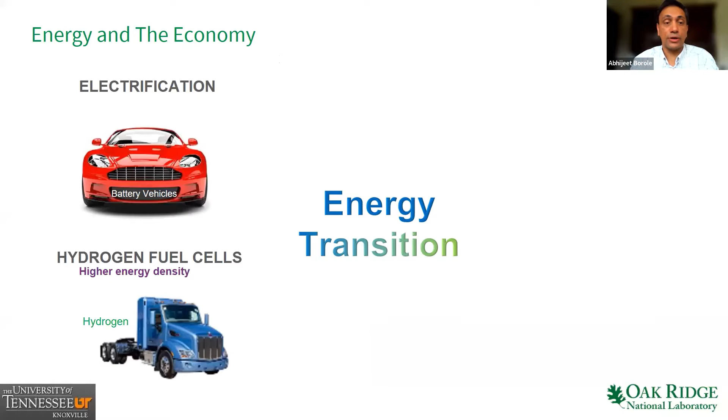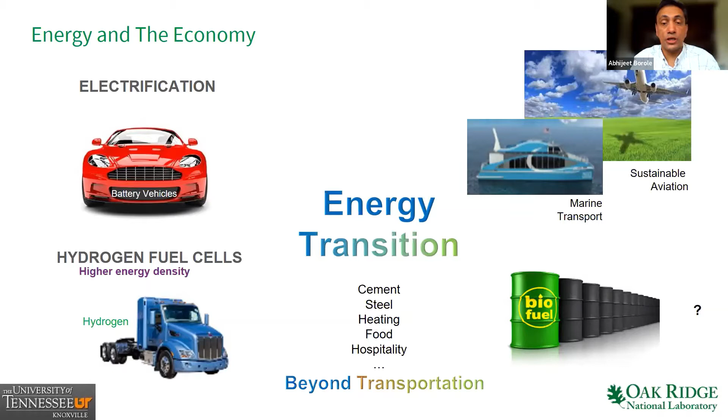As we all know, there's a significant energy transition going on today, and there is a big move towards electrification. However, there is also a lot of push for hydrogen, and the hydrogen economy is really growing up. There is a need for also changing the fuels that we use for aviation and marine transport, so whether the answer is biofuel is a question. In addition to transportation fuels, there is also a need for moving from petroleum-based energy to other clean energy for cement, steel, and other kinds of industries.

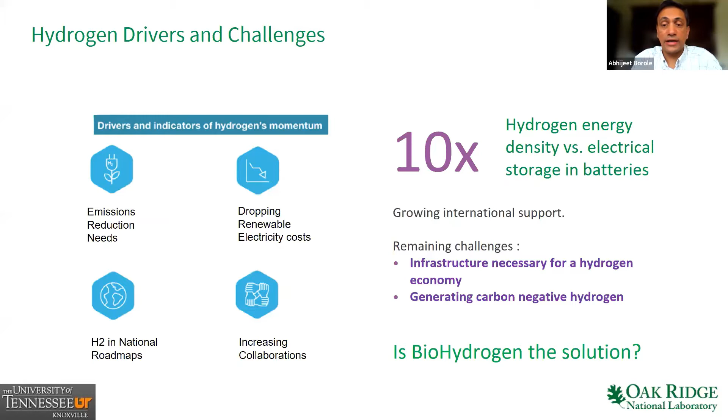So hydrogen has significant drivers and challenges that are coming up, and over the last 3 years there has been a ramp up by different countries and different corporates moving along to really contribute to hydrogen production. Today's challenges remain developing the infrastructure for producing hydrogen, and also developing carbon negative or green hydrogen solutions. So again, biohydrogen is a good candidate, and we'll discuss that today.

In terms of biohydrogen production pathways, there is the fermentation pathway, which is basically anaerobic conversion of sugars and other molecules into hydrogen. The second pathway is biophotolysis, which uses light and microalgae or other photosynthetic bacteria to produce hydrogen. And the third one is microbial electrolysis cells, which is an integrated biological and electrochemical catalysis pathway to convert organic molecules into hydrogen with application of a small voltage.

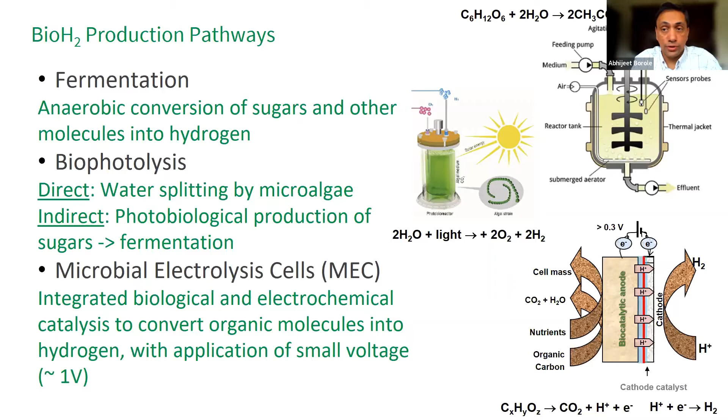This slide gives you a starting overview of the potential for producing hydrogen from these particular technologies. Starting with fermentation, in comparison to the hypothetical hydrogen production from a molecule of glucose, which is 12 moles, in fermentation you can only produce 4 moles of hydrogen per mole of glucose. Practically, you have about half of that observed in the lab as well as at full scale. The second one is a modification of that, where we combine photofermentation with dark fermentation, and that way you can actually increase the yield of hydrogen to 12 theoretically.

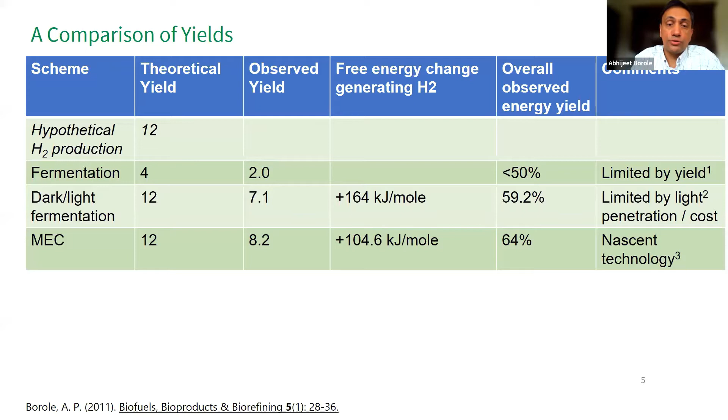Practically, there have been numbers like around 7 moles of hydrogen per mole of glucose that have been reported. The third one, microbial electrolysis, is also capable of producing 12 moles of hydrogen, and the yields observed have been slightly higher in this particular technology, which is very new.

In comparison to the non-biological routes for converting sugars into hydrogen, there's autothermal reforming, which can produce 10 moles theoretically and practically about 9.5. Also the biomethane pathway through SMR, which is 8 theoretical moles and 6 observed moles.

So in order to move the fermentation process, developing commercial technologies based on fermentation, there are a few limitations. Besides the 4 moles of hydrogen per mole of glucose, there are also significant amounts of volatile fatty acids produced in the process, which result in high effluent BOD that cannot be disposed of very easily. Also, there may be pretreatment requirements for removing inhibitors, and there's a need for separation of hydrogen from carbon dioxide, which is produced in the process.

There is definitely a lot of scope for improvement in fermentation processes, particularly in combination with photofermentation, as I indicated earlier. Developing these photobioreactors for combined dark-light fermentation or separate fermentation is one of the pathways for improving these technologies. There's significant work also going on in genetic engineering of microbes to improve the hydrogen yield through metabolic engineering.

If you look at biophotolysis, which is a way to use light in combination with the biological process, always the problem with the photoreactors is the penetration of light to really provide the energy required for conversion and production of hydrogen.

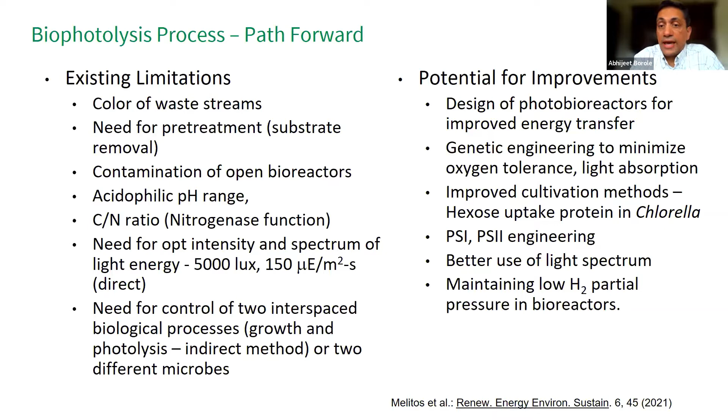I would like to move into the microbial electrolysis technology, which is where I have done most of my work and focus. One of the things with this technology, as I indicated earlier, is that you can produce 12 moles of hydrogen per mole of glucose through this technology, and there's potential to really use electricity which is available in abundance, and sometimes we have to not use it because batteries are not available and so on.

So microbial electrolysis is a way to really combine biology and electrochemistry to make hydrogen. Similar to the other processes, this also has a number of limitations which can be addressed by improving the process design, system design, as well as biological parameters.

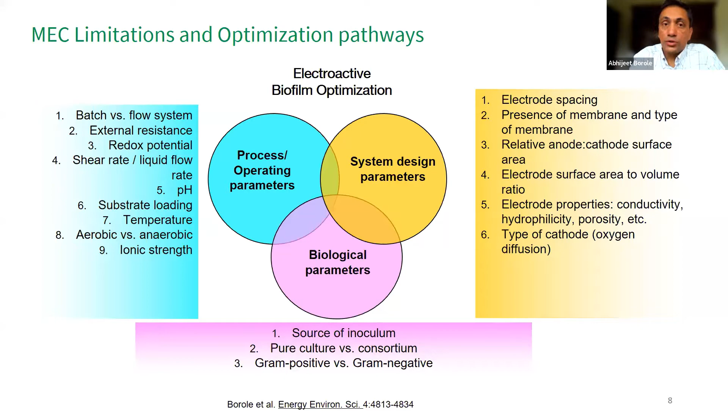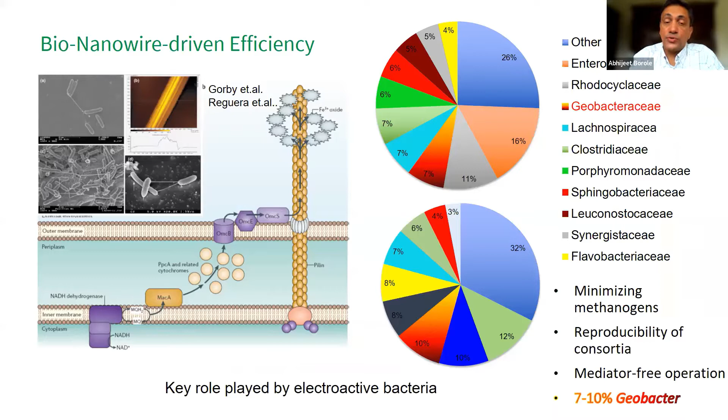The key to this process is the biofilm, which is actually capable of converting sugars and other molecules into electrons, which are then converted into hydrogen through electrolysis, kind of a partial electrolysis process. The key to this is the electroactive bacteria, which do electron transfer directly from the microbe to the electrodes. This allows the process to really have a high efficiency.

I show here a couple of pie charts, which are basically different microbial consortia developed for treating waste and biomass related streams into hydrogen. The typical microbe utilized in these systems is Geobacter sulfurreducens and other Geobacter species. In typical consortia for production of hydrogen in these systems, it can be as low as 7 to 10%, but also as high as 90%.

Now I'd like to look at the interface between biorefineries and hydrogen. There are three main pathways which are looked at in biorefining for producing biofuel and other building blocks that we need for the future. The biochemical pathway uses fermentation of biomass to make alcohols and other products - this is one pathway we will look at. The other one is thermochemical, which uses pyrolysis or gasification of biomass to make products.

And then the third one is algal feedstocks, which are typically processed via hydrothermal liquefaction to produce a bio-oil, which can then be converted into biofuels.

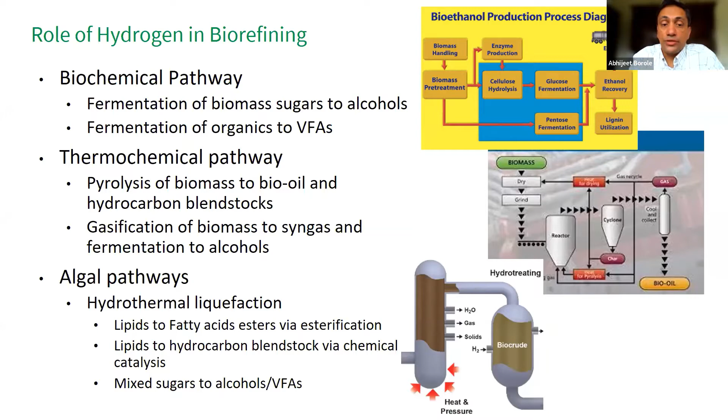So in these collaborations, we work with these national labs to use the waste streams they provided to make hydrogen, and also look at different kinds of pretreatments, including pyrolysis, hydrolysis, and so on.

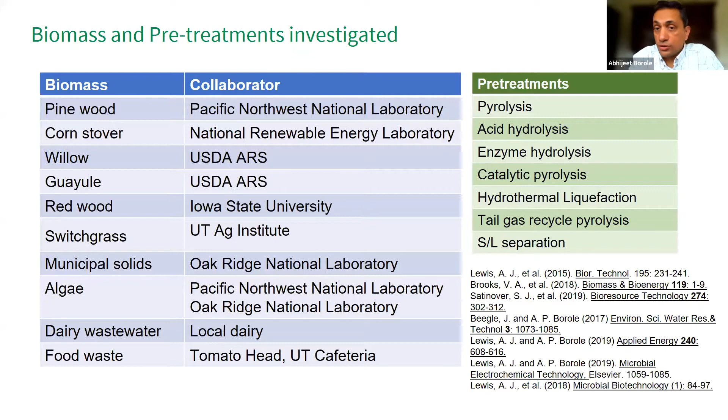So I would like to give you an overview of the potential performance metrics that we can obtain for these kinds of systems, and then go into the details of how this can be implemented in the biorefinery.

So to start with, I would like to talk about the performance criteria for microbial electrolysis. Of course, hydrogen productivity is a main target for achieving commercial feasibility. And then there are a lot of other efficiencies related to conversion of waste into electrons and then into hydrogen, corresponding to anode efficiency, cathode efficiency, COD removal efficiency, as well as electrical efficiency.

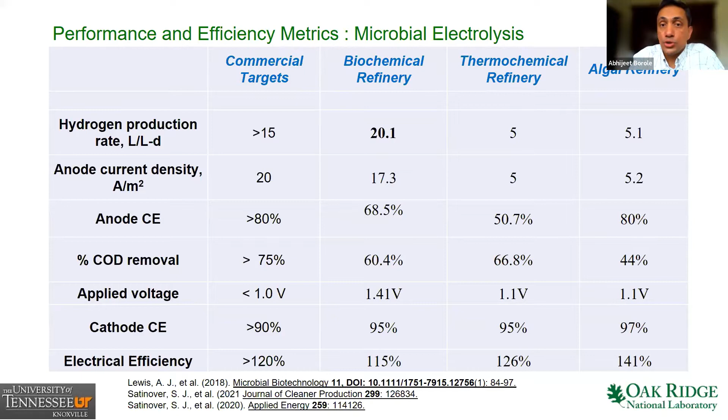Interestingly, in the last few years, the target for hydrogen production, a rate over 15 liters of hydrogen per liter of reactor per day, has been achieved using some of these streams. The efficiencies of producing hydrogen from waste materials and biomass have been demonstrated, which encourages developing this technology at commercial scale.

So some details about the biochemical conversion pathway and how microbial electrolysis can be coupled to the typical biochemical refining process. This work was conducted in collaboration with the National Renewable Energy Lab using corn stover as a feedstock.

The hydrolysis process breaks it down into a liquid stream, which is fed to a fermentation reactor. And the effluent that comes out of fermentation, which is basically unconverted molecules, was then used to make hydrogen. This essentially allows you to improve the overall energy efficiency of the process, as well as produce hydrogen for other uses.

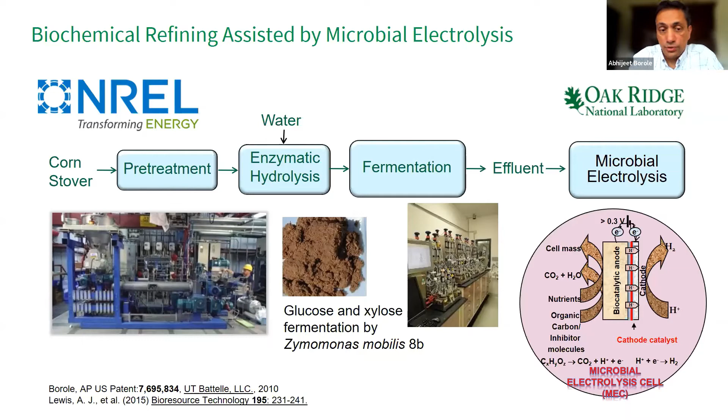The second one I'm going to talk about is pyrolysis microbial electrolysis, which is a way to convert biomass into biofuels and hydrogen through this pathway, which integrates pyrolysis and microbial electrolysis.

In this example, switchgrass was pyrolyzed, producing a bio-oil, and then the bio-oil was separated into an aqueous phase and an organic phase, because as many of you may know, there's a significant high oxygen content in bio-oil, as well as high water content.

So in order to make biofuels from oils that are derived through biomass pyrolysis, you have to do a lot of oxygen removal, or deoxygenation, which requires hydrogen.

So the concept here was to provide that hydrogen through the aqueous waste produced from pyrolysis, via microbial electrolysis, and then generate hydrogen. This results in two potential products: hydrogen as well as bio-oil, which can then be converted into liquid fuels through deoxygenation via the renewable hydrogen that is produced.

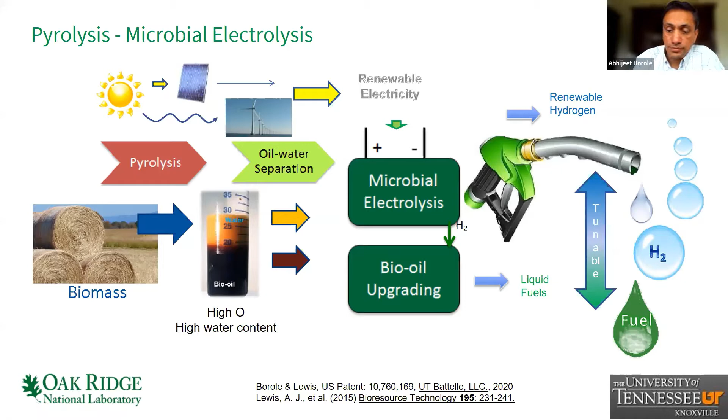The other refineries that have been looked at use algae as a feedstock. In this example, the algae were broken down through hydrothermal liquefaction, producing a bio-oil, and then the aqueous part of that bio-oil was used to produce hydrogen.

In this process, because of the high nitrogen content of algae, you're actually able to also potentially produce a side stream of ammonia, which can go into fertilizer production and so on.

So in this particular process, we had also looked at nutrient recycle to allow minerals and so on to be recycled into the algae pond. This really results in a circular algal biorefinery kind of concept.

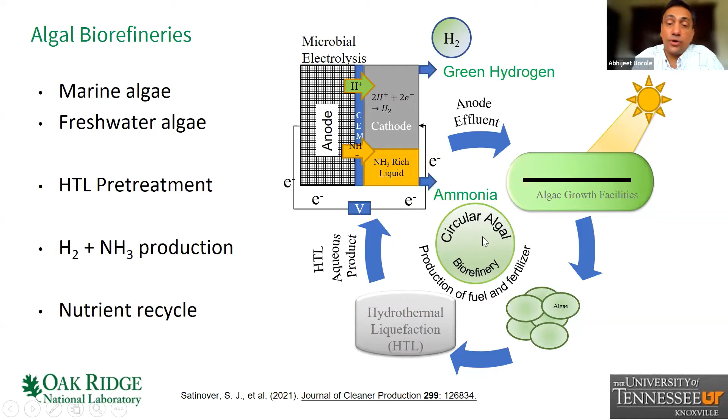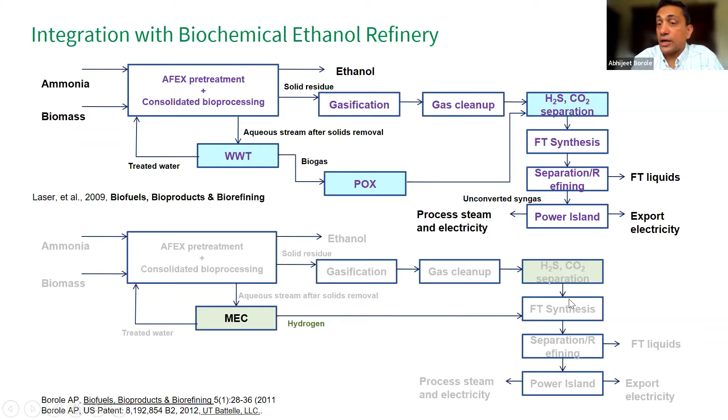When you want to apply these different concepts at the biorefinery scale, here is one example, because you want to integrate the processes with mature technologies. This gives one example of how that can be done in a biochemical refinery, where you could use AFEX treatment, using ammonia, or consolidated bioprocessing, which produces ethanol, but then the solids can be gasified to produce syngas, which can be cleaned up to use as Fischer-Tropsch synthesis feedstock. But you do require hydrogen for that. In this particular mature pathway, you could do that through wastewater treatment, producing methane and partial oxidation of the biogas. However, if you are able to use microbial electrolysis, as we showed, you can potentially directly produce that hydrogen and supply it to the Fischer-Tropsch synthesis to increase the hydrogen content of the feed.

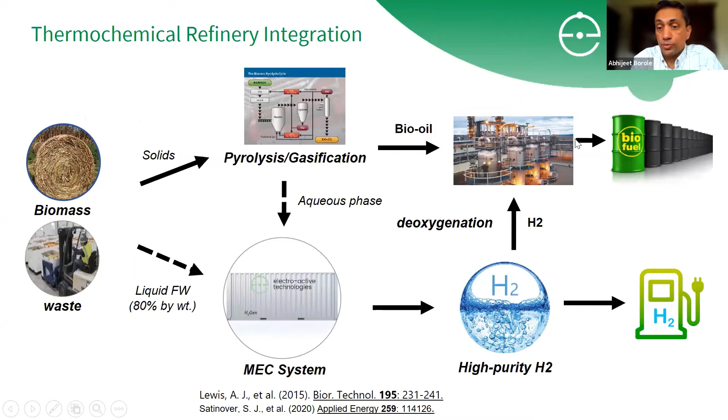Going to the pyrolysis kind of process, you could use the hydrogen produced through microbial electrolysis to deoxygenate the bio-oil and produce biofuels. Similarly for algal fuels, you could take the algae, make the bio-oil, and then use the hydrogen to produce a clean biofuel, while also potentially having hydrogen available for individual sales.

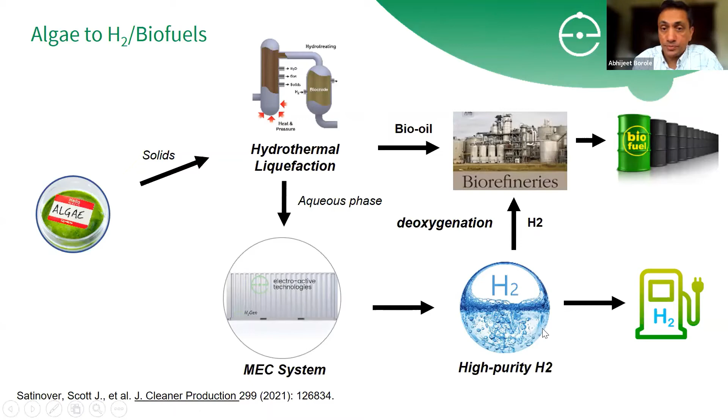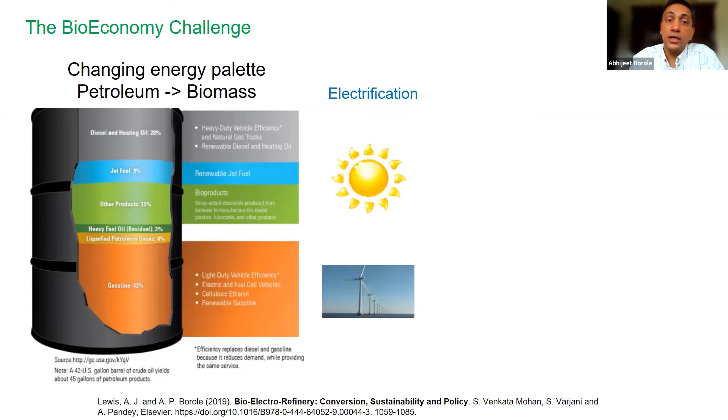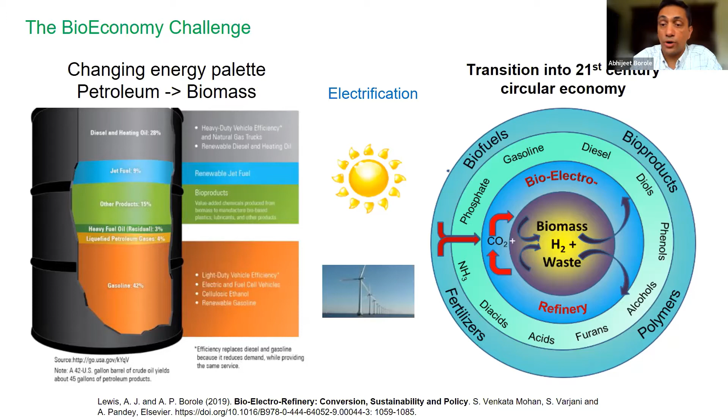When you want to integrate all of these processes into a biorefinery, there's a significant need to move from fossil fuel based economies to biomass and bioeconomy. So you have a whole palette of products that we generate today from petroleum. In order to convert those into the materials and feedstocks we need for our 21st century, you want to combine the current economy, which is moving towards electrification, with biomass. The pathway to that could be through a bioelectrorefinery, where you could produce hydrogen and also a number of other products required for economies today, including fuels, food, and chemical feedstocks, which would go into producing bioproducts, polymers, fertilizers, and so on.

When we look at the pathway to commercialization, I talked about biomass and algae. One of the things we have been looking at, as I indicated, I'm also part of a startup. We found out early on that there is another feedstock which might actually be very feasible to use for producing hydrogen, and that was food waste. Similar to biomass, which is available at around 1.3 billion tons in the US, food waste availability is around 1.3 billion tons around the world. That's a significant waste of resources, so that's one of the feedstocks we have been looking at in order to make hydrogen.

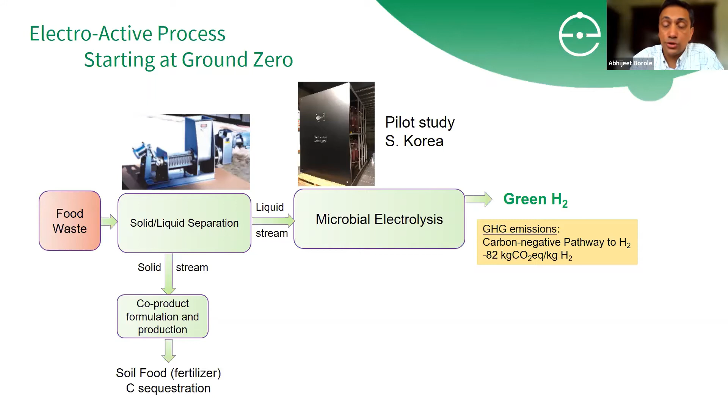We have a pilot study going on in South Korea based on microbial electrolysis using food waste as a feedstock to produce green hydrogen. In the simplest way, you could produce a second byproduct from this, taking the unconverted material from the food waste and returning it back to agriculture as a fertilizer. You could return NPK as well as carbon back to the soil to really create a circular process. So one of the things we are looking at is developing these circular and inclusive processes, converting food waste into a fuel like green hydrogen, plus fertilizer and a water stream, which can contribute not only to CO2 emissions reduction, but also to other ESG parameters critical for many corporates today as we move towards a clean and circular economy.

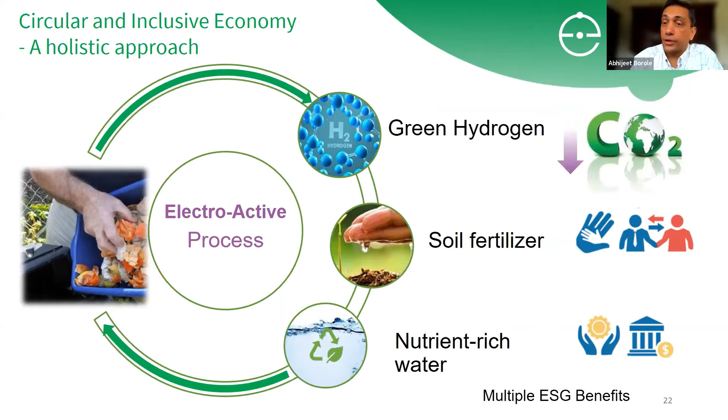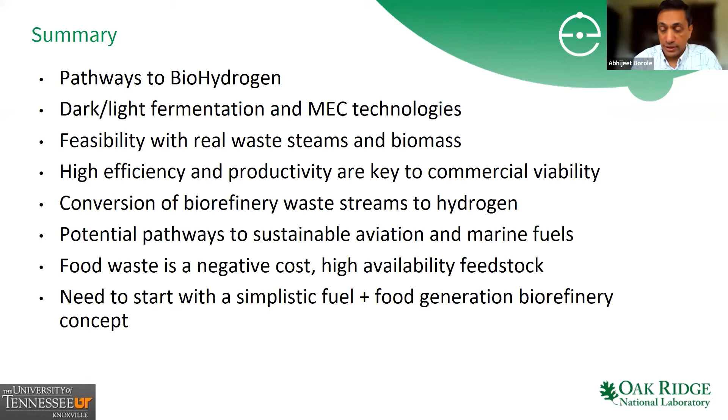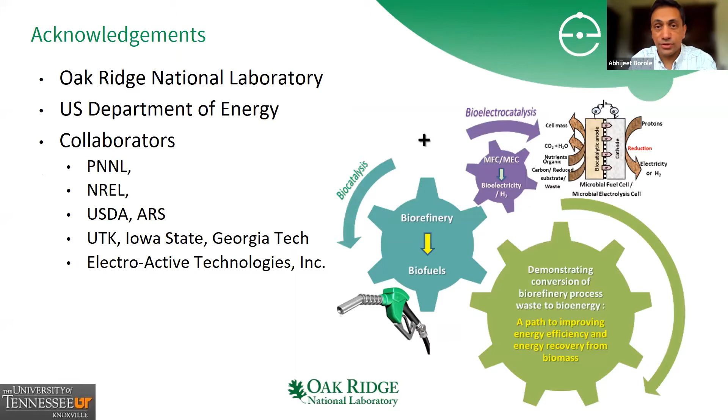So with that, I would like to wrap up and summarize our discussion. We talked about the pathways to biohydrogen and how dark and light fermentation and MEC technologies can lead the way, the feasibility of using real waste streams and biomass, and the key parameters of efficiency and productivity of hydrogen that make this possible. We discussed how we can integrate MEC technology into a biorefinery to make hydrogen for producing clean biofuels, targeting sustainable aviation fuels and marine fuels, and the ability to take food waste as a negative cost feedstock to make hydrogen, entering a circular economy using food waste to produce fuel and food additionally in a circular process. With that, I'd like to acknowledge the work done at Oak Ridge National Lab, the US DOE for funding, and collaborators at the different national labs. I'll stop and transfer the screen back to you.

Thank you so much, Abhijeet. It has been extremely interesting and informative. You've guided us through all the various processes. It was interesting to notice the variety of biomass you mentioned that could be used, and it was extremely interesting to see the circularity approach you stressed more than once — the importance of looking not only at energy production, but also at bioproducts, which is the win-win of these kinds of technologies, looking also at soil fertility rather than just nutrient-rich water. Thank you so much for this extremely interesting overview. I already see a number of questions being raised in the Q&A and the chat, but we'll leave those for the discussion session.

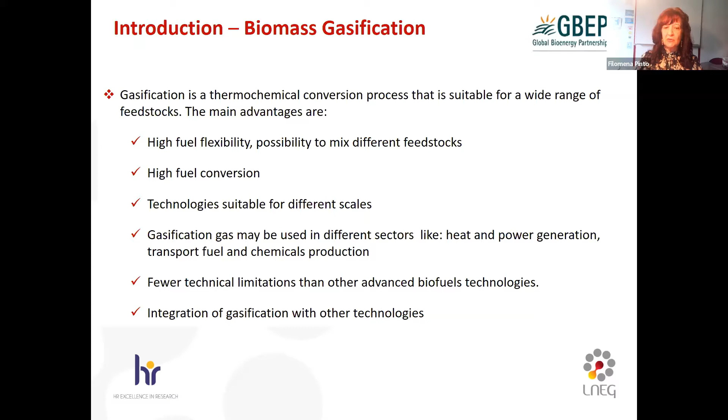To start, I'd like to focus on the fact that it is possible to gasify a lot of feedstocks from biomass, like sewage sludge, forestry biomass, other industrial wastes, energy crops, and so on. But it is also possible to gasify other types of wastes, like plastic mixtures, used tires, RDF, and so on. It is also possible to prepare different mixtures of all these feedstocks.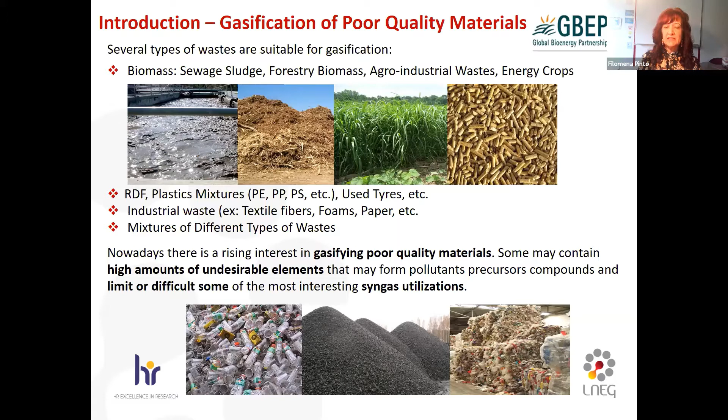Nowadays there is a rising interest in gasifying poor quality materials, but this brings some challenges, because if these materials contain undesirable elements, unwanted compounds will be formed and released into the syngas, which makes the cleaning and conditioning processes of syngas more complex.

Syngas may have different applications. The more developed ones are heat and power generation by using syngas in gas turbines, engines, fuel cells, or boilers. But as mentioned before, it is also possible to produce fuels by chemical synthesis. Some of the most important are presented here.

Syngas may also be used to obtain hydrogen. And as mentioned in the previous presentation, it is also possible to use syngas in anaerobic fermentation to produce bio-based chemicals.

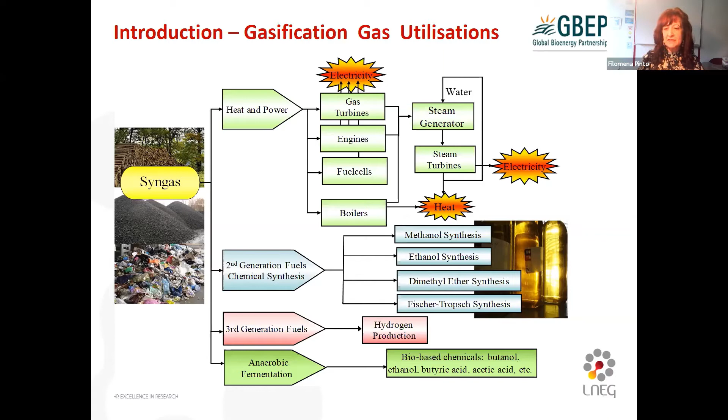Nowadays there is much information about gasification and much knowledge. The gasification main research areas focus on syngas utilization to produce biofuels and biochemicals, to produce synthetic natural gas, to achieve capture, storage, and utilization of CO2 from the gasification process. Another area is to study the possibility of soil impregnation with biochar produced by gasification, and of course, the theme of today's presentation, the production of biohydrogen.

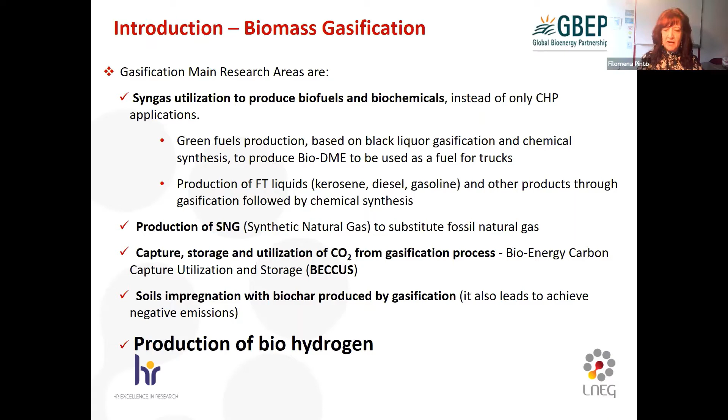So there is a long way from the gasification process to the production of biohydrogen. After production of syngas, cleaning and conditioning processes are very important, because gasification gas composition depends not only on the gasification technology and conditions, but also on the feedstock used for gasification. When the composition of the initial syngas is quite different from the composition required for syngas utilization, cleaning and conditioning may become very complex, which increases the capex and opex.

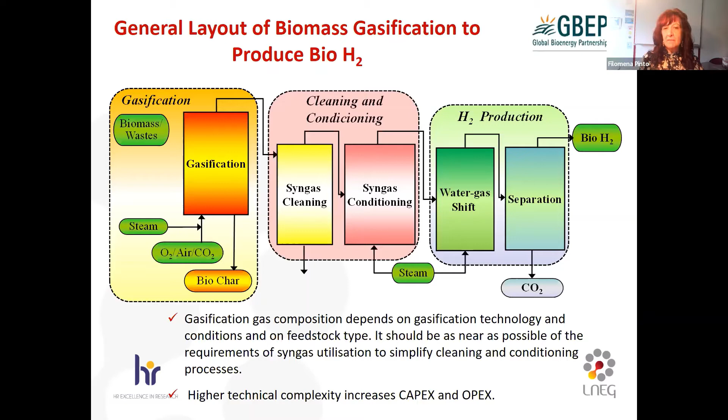Moving to biomass gasification technologies, there are different possibilities: fixed bed, fluidized bed, and entrained flow gasifier. They require different gasification conditions, namely temperature. Entrained flow gasifier requires the highest temperatures and lowest particle sizes. The choice of technology depends on the feedstock we want to gasify and the application we want to give to the gas produced.

If we want to obtain hydrogen, it's important that the syngas is free of nitrogen. We have two options: autothermal gasification, where the heat needed is produced inside the gasifier by partial oxidation of the feedstock - if producing hydrogen, air can be used but oxygen is the best option - or allothermal gasification, where heat needs to be supplied externally.

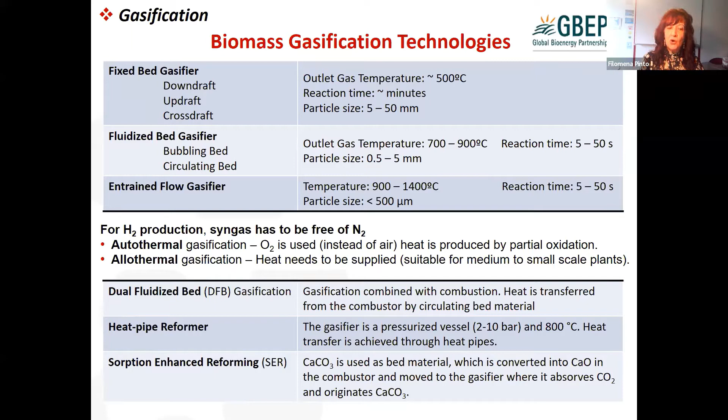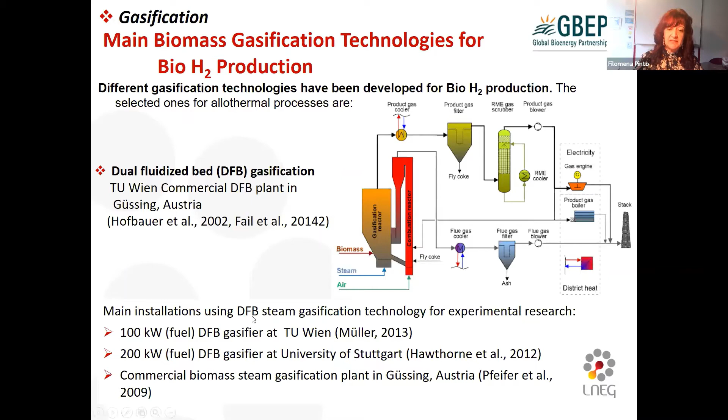Now I'd like to move to some more recent gasification technologies, starting with dual fluidized bed gasification. Here we have two sections: the gasification one and the combustion one. The feedstock is burnt in presence of air to produce heat, which increases the temperature of the bed material that moves to the gasifier and supplies the needed heat. Char and bed material are again transported to the combustion reactor to restart the process. There are some main installations that have tested this technology with success.

The MILENA gasification technology is similar to the previous one, but here the gasifier section is a riser where biomass and steam are introduced together with the hot bed material. At the top of this riser, there is separation of the gas, and the solids go back to the combustion zone to be heated.

In the heat pipe reformer, the concept is different because we don't have a bed material. Instead, the heat is supplied by a heat pipe. We have heat pipes filled with a carrier that evaporates in the combustion zone, and in the gasification zone condensates and releases the heat that is needed.

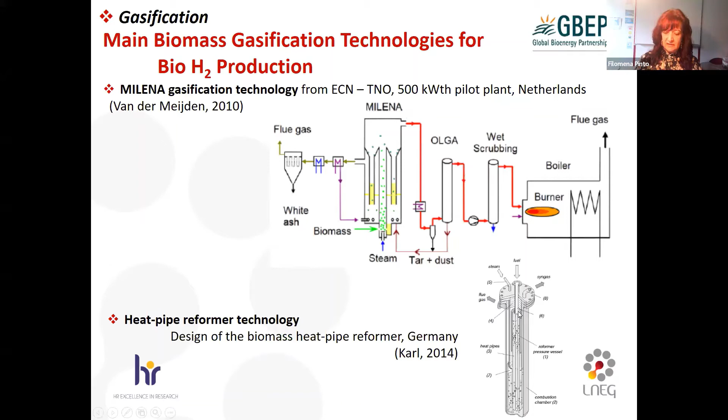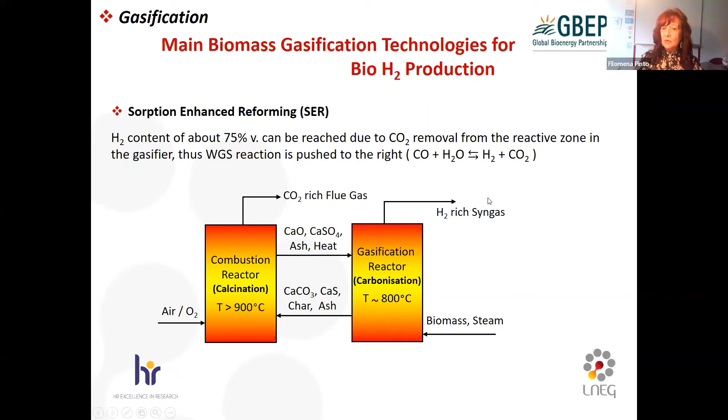Another concept is the sorption enhanced reforming, where two reactors are used - a combustion reactor and a gasification reactor - with a circulating loop. In the combustion reactor, limestone is used, and calcium carbonate releases CO2 and forms calcium oxide, which goes to the gasification reactor and reacts with the CO2 released by the gasification reactions, forming calcium carbonate again that goes back to the combustion zone. Through this process, it is possible to obtain a syngas rich in hydrogen and poor in CO2.

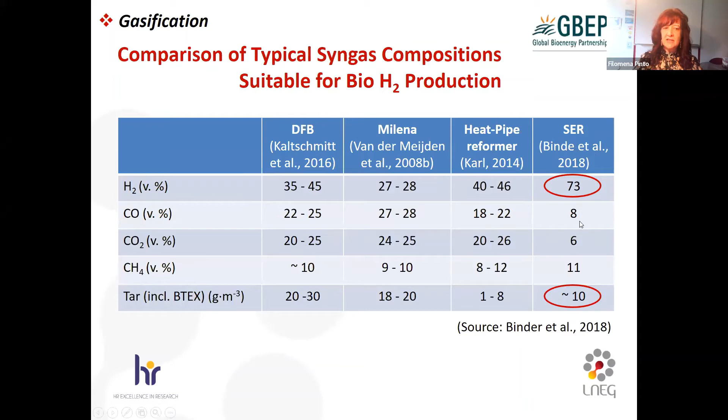If we compare syngas compositions obtained by these technologies, we find that the SER process produces the highest hydrogen and the lowest CO and CO2, and the tar content is also low.

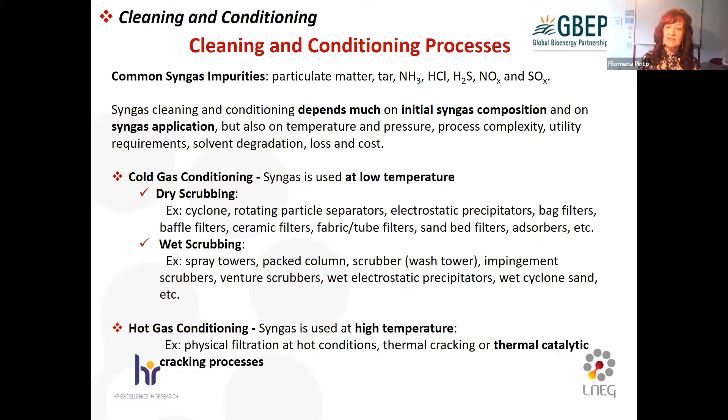Next, we have to concentrate on the cleaning and conditioning processes to remove or at least decrease the contents of the main impurities: particulate matter, tar, ammonia, hydrogen chloride, and hydrogen sulfide. The cleaning and conditioning processes depend very much on the initial syngas composition and also on the syngas application. There are two main options: cold gas conditioning, using low temperatures, where we may choose dry scrubbing or wet scrubbing; or hot gas conditioning, where the gas is treated at high temperature by thermal or catalytic cracking processes, among others. This process is a good option if the syngas needs to be used in a process requiring high temperature.

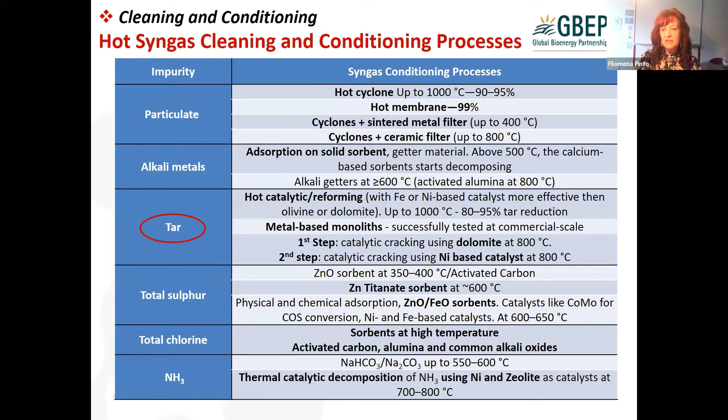Here is a list of some syngas conditioning processes to remove different impurities. I would like to call your attention to tar, because tar is a big problem in gasification processes. For tar abatement, different types of catalysts have been developed and tested, some with good results.

Now I would like to speak a little about the water-gas shift reaction, because it allows an increase in hydrogen content in the syngas through the reaction of CO with steam. Different processes and catalysts may be used, some resistant to sulfur poisoning, some not. In this last case, it is necessary to concentrate on the cleaning processes to decrease sulfur content.

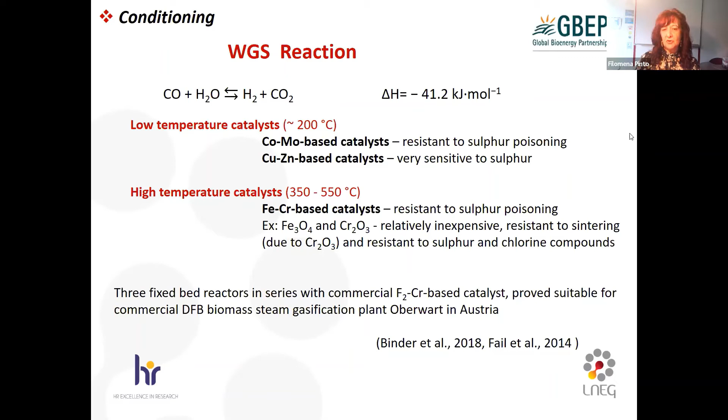As an example, I could mention the tests done at the Oberwart plant in Austria, which successfully tested 3 fixed bed reactors in series using commercial catalysts.

There are many cleaning and conditioning processes, and I don't have time to mention all of them. So I would like to refer to important ones for the biohydrogen route: tar removal by rapeseed oil methyl ester scrubber, where by decreasing the syngas temperature, steam is condensed and tar is removed.

This process may have a problem of the production of a waste stream, but this problem may be more or less solved by burning this stream to produce energy.

Another cleaning and conditioning process I would like to mention is the CO2 removal by amine scrubber. Different amines have been tested, but activated MDEA with piperazine have shown good results. However, there are still some issues that need to be solved, like the significant amount of energy needed for the regeneration step, especially when hydrogen sulfide is present. There are also some problems related to the loss of liquids that need often refilling, and also the formation of non-soluble salts and foaming, and also some corrosion due to the behavior of amines.

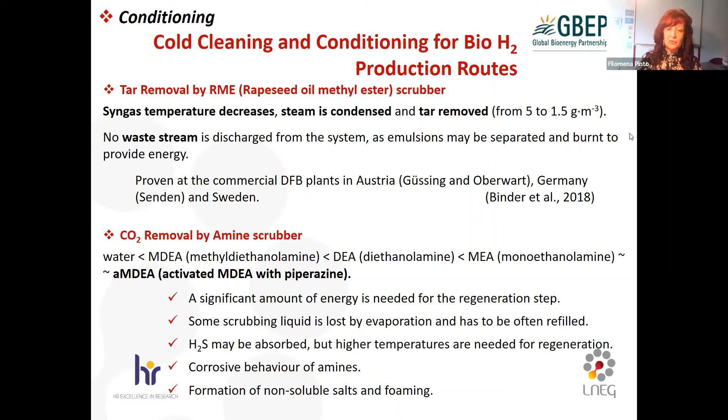Moving to the separation technologies, there are also a large number of options. I would like to mention only two, because they seem to be the best ones for the production of biohydrogen. One is the PSA, pressure swing adsorption, where the feed gas is compressed when entering the PSA vessels. The vessels that are not in contact with the feed, the syngas, are regenerated by lowering the pressure. This concept was tested in the Oberwart plant, where 4 vessels filled with activated carbon were tested with good results, because high hydrogen purity and high hydrogen recovery were reported.

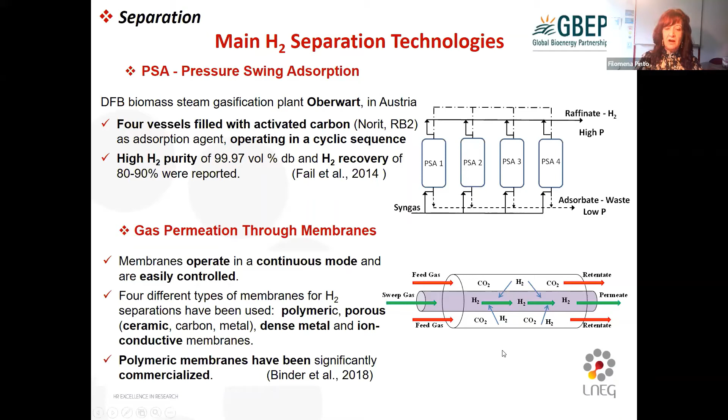Another option is the gas permeation membranes, where the feed gas goes into a vessel that contains a membrane, and only hydrogen is capable of going through it. So we obtain a stream called permeate that contains only hydrogen, and the other gaseous species remain in the retentate. The challenge is to achieve high hydrogen purities, and also high hydrogen recoveries - that is, the retentate should contain low hydrogen content. Different types of membranes have been tested: polymeric, porous, dense metals, and so on, and some of them are available at commercial scale.

Another route is the one based on SER gasification technology. Here the process is less complex because the gasification gas produced already has a high content of hydrogen and a low content of CO2. The water gas shift reaction is not necessary, and the amine scrubber is not needed, so the whole process is less complex. However, the steam needed is lower than in the previous option, and the energy required is also lower, but the production of biohydrogen is less.

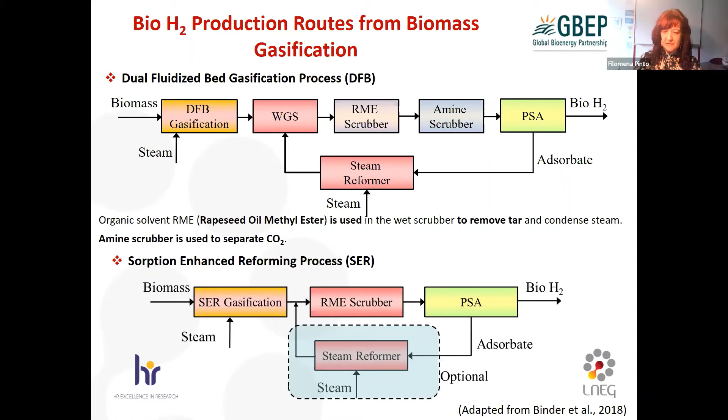Before finishing, I would like to mention that we are still working on this subject. We are participating in a big project, Move to Low C, which is divided into several sub-projects, and one of them is the production of biohydrogen for urban public transport vehicles. The project aims to produce biohydrogen from different renewable sources - biogas, biomethane, and biomass gasification gas - and the main goal is the installation and demonstration of the process and the production of hydrogen, to be tested in public transport vehicles.

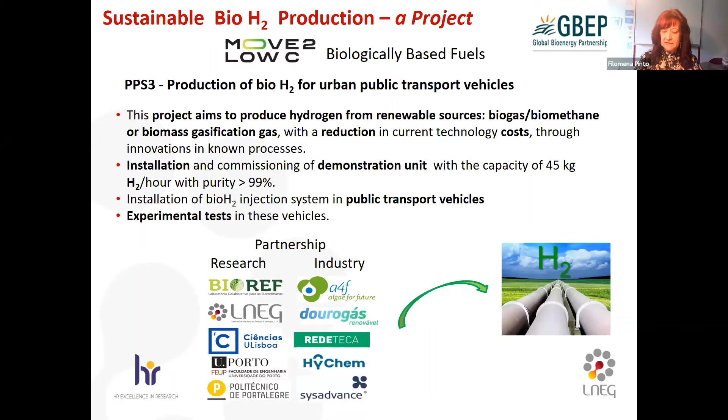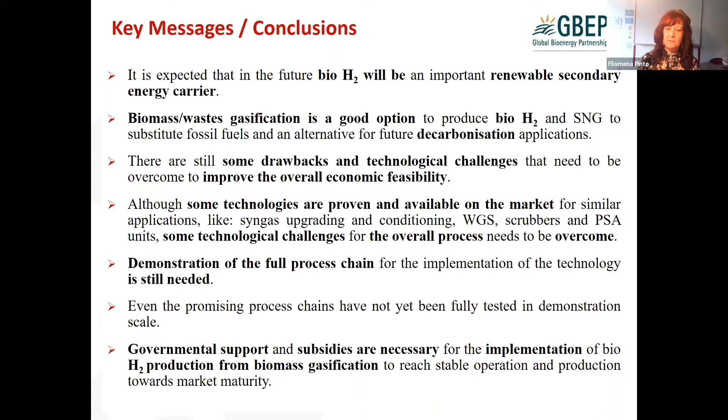Thank you so much, Filomena, for this overview. It was interesting to hear also these technologies that are available on the market. It's important to go into the demonstration, and also the message about needing support in terms of policies and subsidies. That's the key points I take from your presentation. I'd like to remind participants that the recording of this webinar and all presentations will be available on the GBEP website just after this event.

Now we have some time dedicated to a discussion session. We have a very brief keynote speech from David and Francesco to give an overview of their experience on biohydrogen, and then we go directly into the questions I already see in the Q&A and chat.

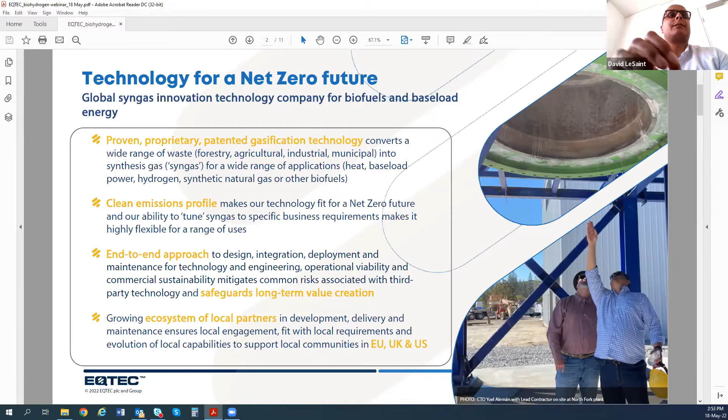We have also established a growing ecosystem of local partners in development, delivery, and maintenance to basically ensure that local engagement is in line with local requirements and the evolution of local capacity to support local communities in the EU, UK, and the US. Please, could you move to the next slide?

So the market we are aiming to address is 98 trillion, which is the net zero addressable market from now to 2050. Hydrogen is expected to contribute to over 20% of the global carbon abatement by 2050. Our class of technology, which is a thermochemical process, we believe it has reached TRL around 8 and 9, and we believe it's a key pathway to produce biohydrogen, something the EU is most focused on progressing capacity for.

Hydrogen is a key industrial decarbonization tool, for instance with on-premise solutions to address immediate demand and also distributed demand. We believe that the EU should incentivize - EU incentives need to really focus on the best life cycle and end-to-end carbon efficiency and reporting. To you, Francesco.

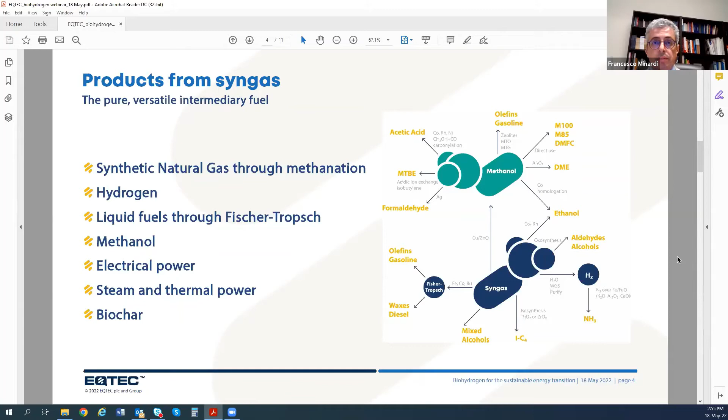Okay, EQTEC. EQTEC is IP, not a piece of equipment, but a bespoke design capability. EQTEC is a proprietary modeling that allows accurate prediction of process quality and quantity of syngas and bottom ash to more or less 5%. EQTEC does bespoke design of all components, enabling maximum uptake of CO, CH4, and/or H2. EQTEC has an exclusive control system to manage heat, pressure, char, and other reaction factors to target relevant feedstock and application combinations.

Of course, EQTEC technology works because of its end-to-end process focus and know-how. EQTEC has a big feedstock library, more than 16 tested and documented feedstocks for efficient operation design. EQTEC has syngas conditioning tuned for the level of purity to suit the application, including ultra-pure for advanced biofuel or hydrogen. More important is the continuous monitoring and feedback in real time to allow variation in the control system to improve efficiency and quality of the process for specific feedstock and application combinations. Next slide.

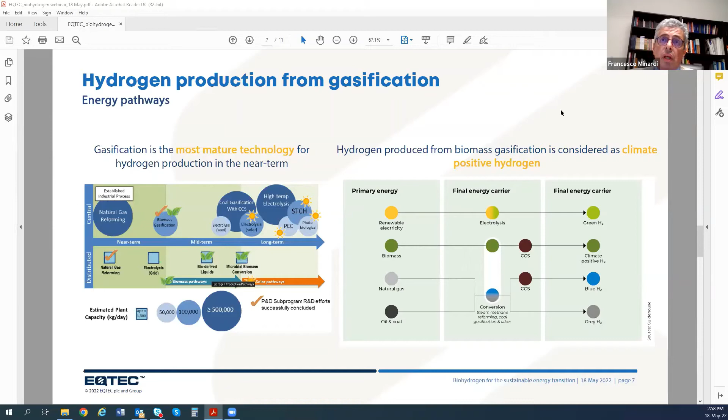In the plant of EQTEC, we expect hydrogen yield for 1 ton per hour of biomass. Wood chips, for example, produce 50-55 kilogram of hydrogen per hour. Gasification is a key pathway to transform forestry and farming waste into biohydrogen as a thermochemical process. The syngas technology provides low-cost hydrogen production in the waste to energy fuel process. With our partner, we have the possibility to realize the whole supply chain from biomass and waste to storage and distribution for all further purposes.

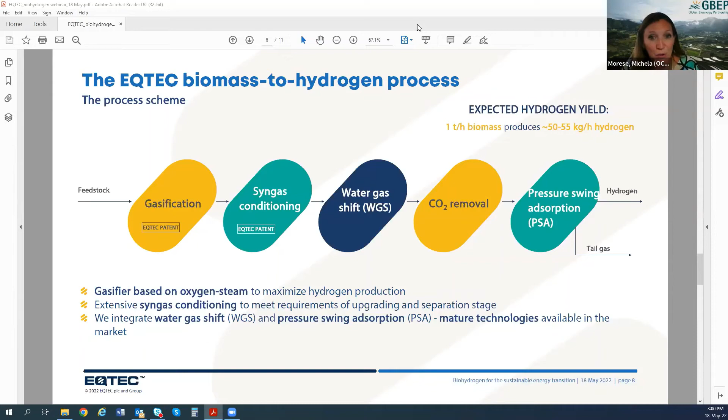Do you see them, David, or do you need any help from my side? Yeah, I see the first question from Olivier, and the answer is not that simple, because it basically depends on what sort of feedstock you're going to gasify. The entire profitability of every project, which means also the cost of production, will depend on what you intend to gasify. So there is no ultimate answer. And there's also the way you're able to convert carbon - some projects may get an extra line of revenue from biochar, for instance, not only from producing hydrogen.

So it's a sort of complex answer to that. Maybe we could open the question also to Filomena and Abhijit. Oh, of course, yes. I quite agree with the answer, because in fact, first of all, we have to decide what is the route, what are the technologies we are going to choose to achieve our main purpose, which is the production of a syngas with a certain required composition for the end use. So it is in fact quite complex unless we first decide exactly what are the units that we are going to choose.